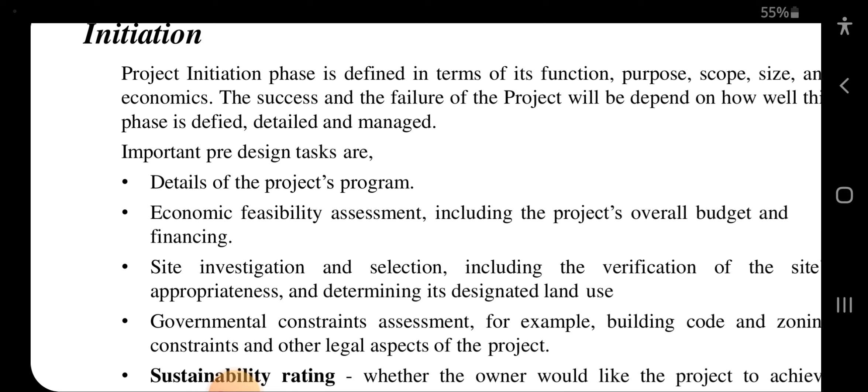Okay, we will go each step deeper a little bit more. Okay, in the initiation, as you can see, the project initiation phase is defined in terms of its function, purpose, scope, size and economics. The success and failure of the project will depend on how well the phase is defined, detailed and managed.

Important pre-design tasks are detail of the project's program, economic feasibility assessment, including the project's overall budget and financing, site investigation and selection, including the verification of the site's appropriateness and determining its designated land use. Government constraint assessment, for example, building codes and zoning constraints and other legal aspects of the project.

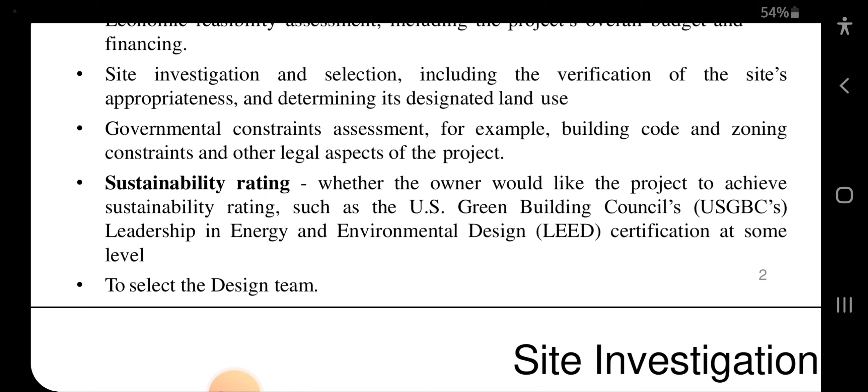Sustainability rating, whether the owner would like the project to achieve a sustainability rating such as US Green Building Council Leadership in Energy and Environmental Design certification at some level. To select the design team. Okay, these are the steps that we can identify at the initiation phase.

So in this phase, as you see, we need to take some approvals and we need to consider the design code such as British code or Euro code, and sustainability rating such as US Green Building Council or LEED. Okay, then we move on to the second phase of this project delivery life cycle, that is planning.

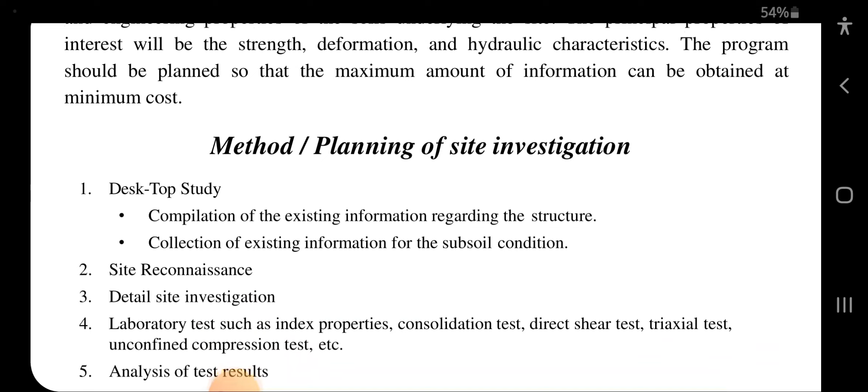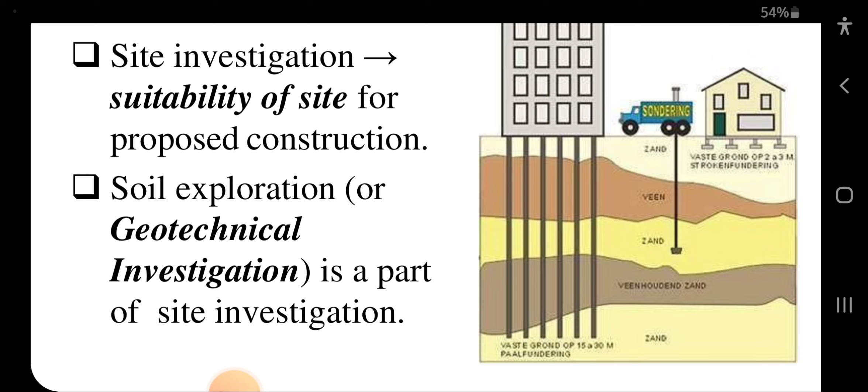In addition to that, we will see a definition. I have given some definition. The process of determining the layers of natural soil deposits that will underlie a proposed structure and their physical properties is generally referred to as site investigation.

Importance of site investigation. Let us see why it is important. To assess the suitability of the proposed site and the environment with the proposed project. Second one, to provide adequate information for design purpose with optimum cost, including temporary work. To plan for the best construction method.

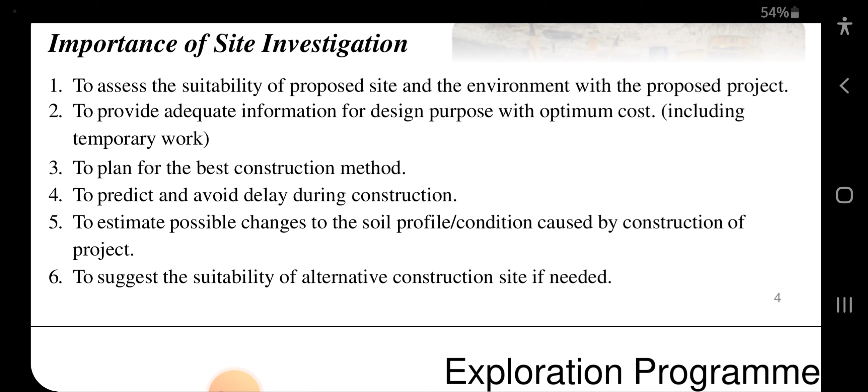Fourth one, to predict and avoid delay during construction. Fifth one, to estimate possible changes to the soil profile and condition caused by construction of the project. To suggest the suitability of an alternative construction site if needed.

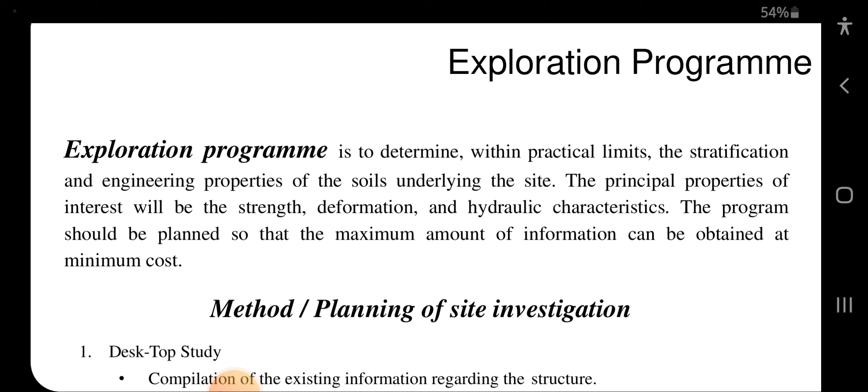Exploration program. The exploration program is to determine, within practical limits, the stratification and engineering properties of the soils underlying the site. The principal properties of interest will be the strength, deformation and hydraulic characteristics. The program should be planned so that the maximum amount of information can be obtained at minimal cost.

Okay, now we will see methods or planning of site investigation. Desktop study. So you have to know these technical terms when you are working in a construction site. Okay, we will see the desktop study. It is compilation of the existing information regarding the structure, collection of existing information for the subsoil condition.

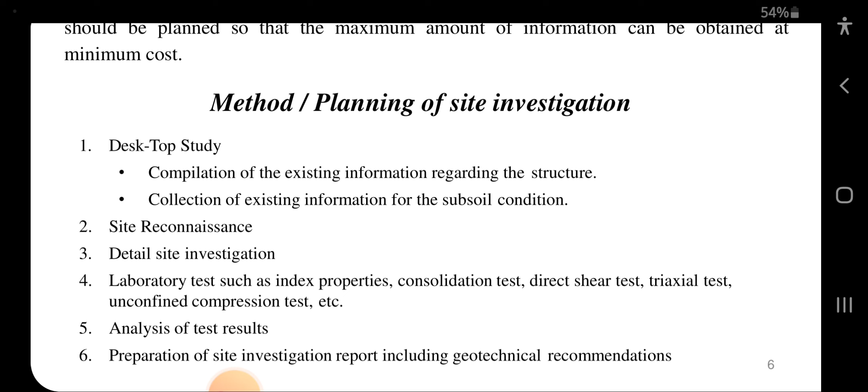Second one, site reconnaissance. Third one, detailed site investigation. Fourth one, laboratory tests such as index properties, consolidation test, direct shear test, triaxial test, unconfined compression test, etc. Fifth one, analysis of test results. Sixth one, preparation of site investigation report including geotechnical recommendations.

Okay, now you will see what is desktop study. Introduction. This refers to the studies carried out through research rather than physical investigation. This is the preliminary investigation carried out for the proposed project. This will be less time consuming and less expensive than the physical investigation. Initial understanding of the site situation, potential risks and details, scope and methodology of subsequent investigation.

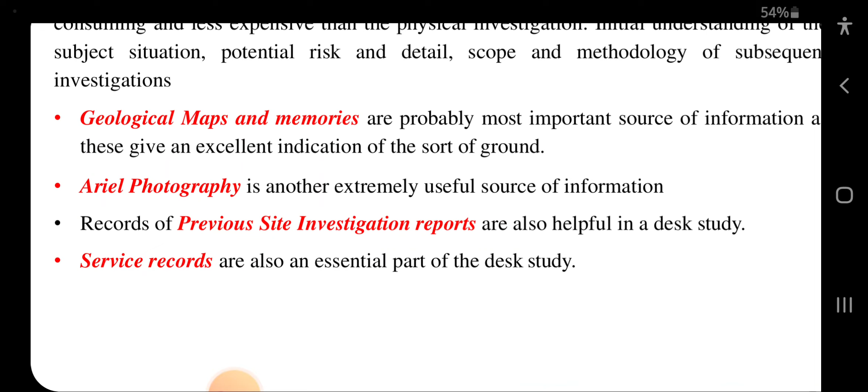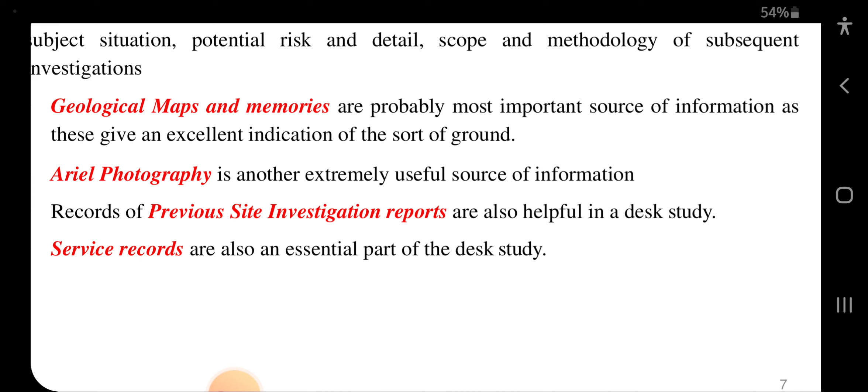Geological maps and memoirs are probably the most important sources of information, as these give an excellent indication of the sort of ground. For example, you can see Google Maps of the site. Aerial photography is another extremely useful source of information. Records of previous site investigation reports are also helpful in a desk study. Service records are also an essential part of the desk study.

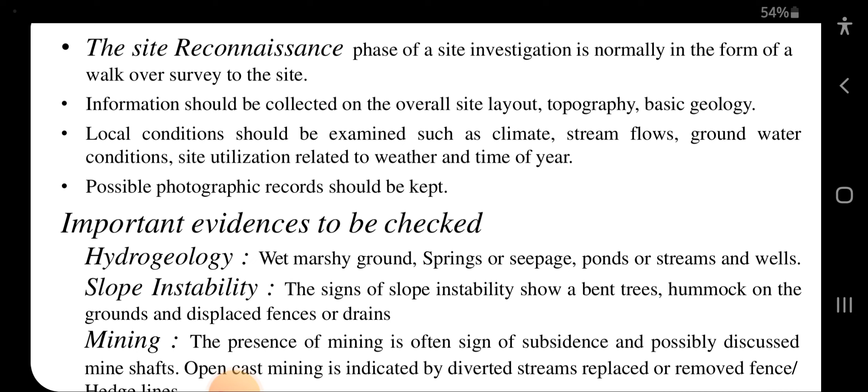Site reconnaissance. The site reconnaissance phase of a site investigation is normally in the form of a walk-over survey of the site. Information should be collected on the overall site layout, topography, basic geology. Local conditions should be examined, such as climate, stream flows, groundwater condition, site utilization related to weather and time of year. Possible photographic records should be kept. Important evidence to be checked.

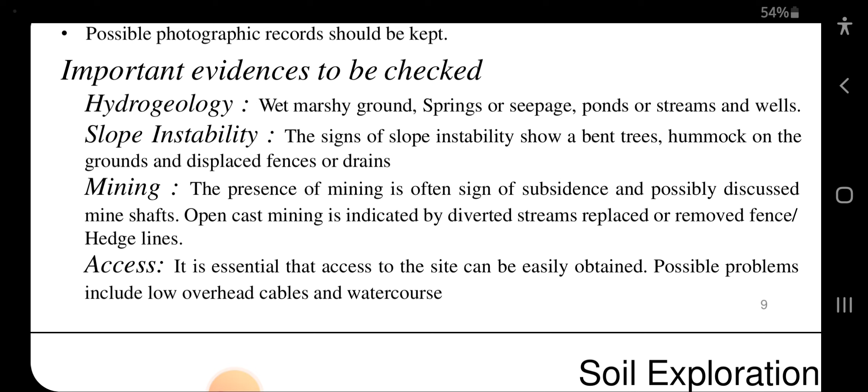Springs or seepage, ponds or streams and wells. Slope instability. The signs of slope instability are bent trees, hummocks on the ground and displaced fences or drains. Mining. The presence of mining is often a sign of subsidence and possibly disused mine shafts. Open cast mining is indicated by diverted streams, replaced or removed fences, hedge lines. Access. It is essential that access to the site can be easily obtained. Possible problems include low overhead cables and water courses.

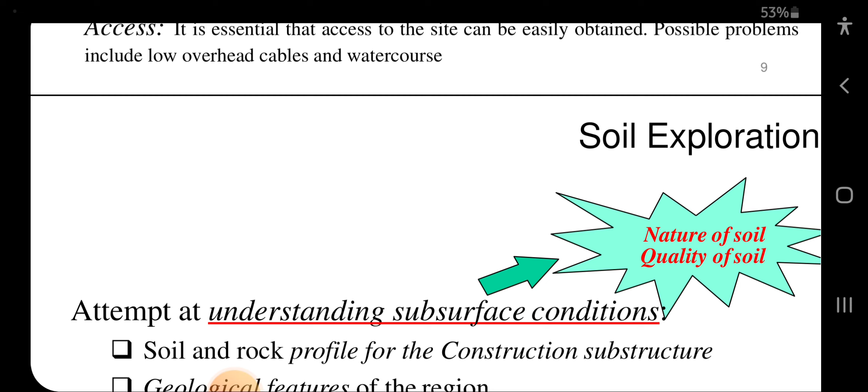Soil exploration. Nature of soil, quality of soil we will explore. Attempt at understanding subsurface conditions. Soil and rock profile for the construction of the substructure. Geological features of the region. Position and variation of groundwater table. Physical properties of soil and rock. Contamination, if any. General data of adjacent structures, hydrological data, topography, soil maps,

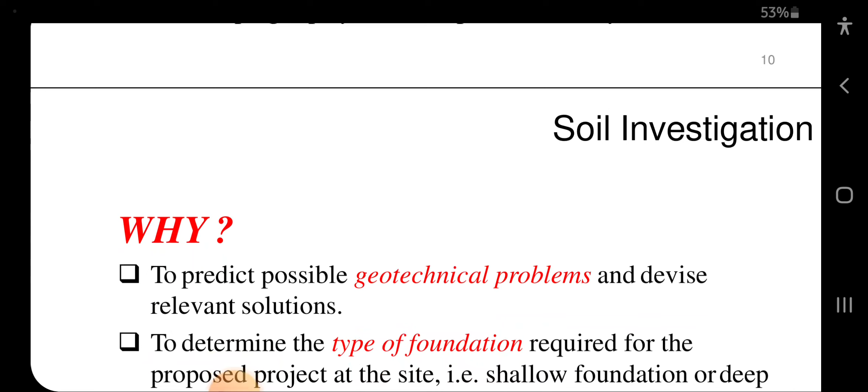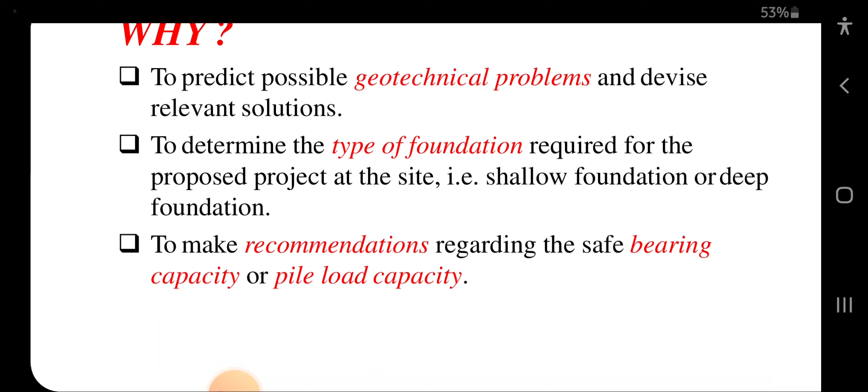seismicity, etc. Soil investigation. Why do we do soil investigation? To predict possible geotechnical problems and devise relevant solutions. To determine the types of foundation required for the proposed project at the site, that is shallow foundation or deep foundation. To make recommendations regarding the safe bearing capacity or pile load capacity.

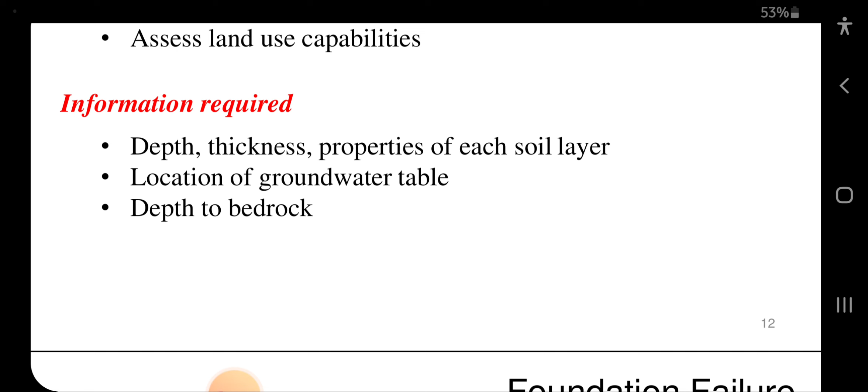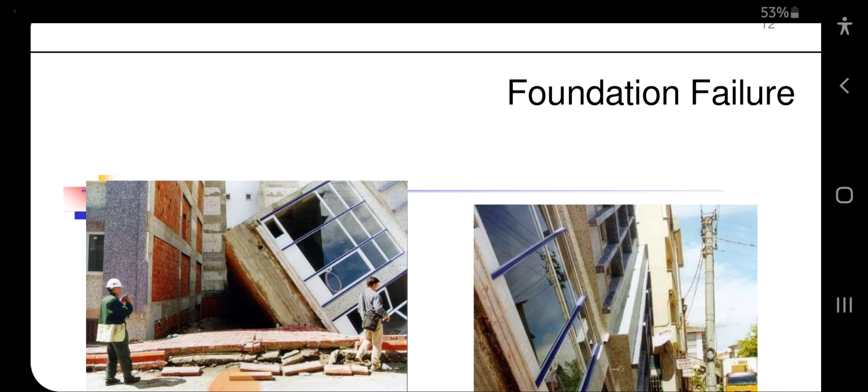Okay, now we will see some images of some defects in foundations. So foundation failures, as you can see in both images, the structures are collapsed. See, on your left hand side and right hand side, all the structures are collapsed. Sinkholes, you see some places where the ground has sunk.

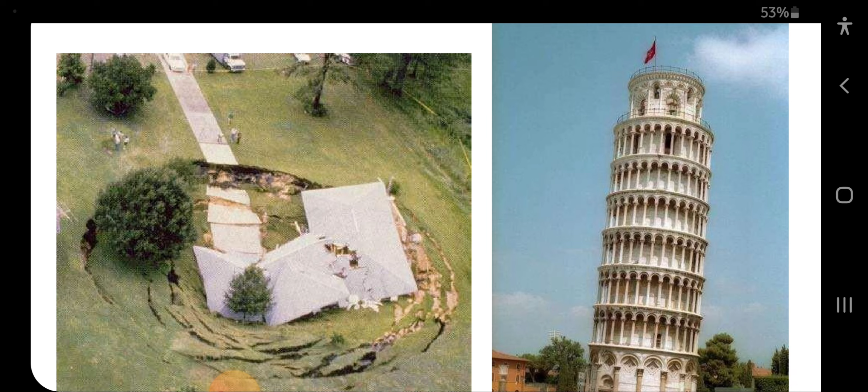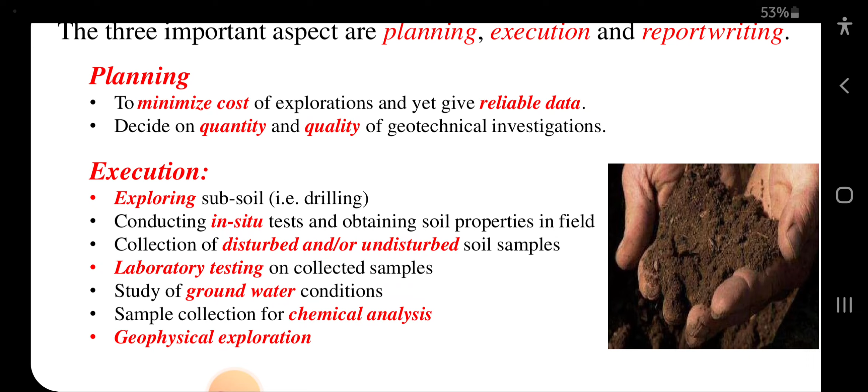Right. Soil exploration. We will see how soil exploration will be done. The three important aspects are planning, execution and report writing. Planning, to minimize cost of exploration and yet give reliable data. Decide on quantity and quality of geotechnical investigation. Execution, exploring subsoil, that is drilling. Conducting in situ tests and obtaining soil properties in the field.

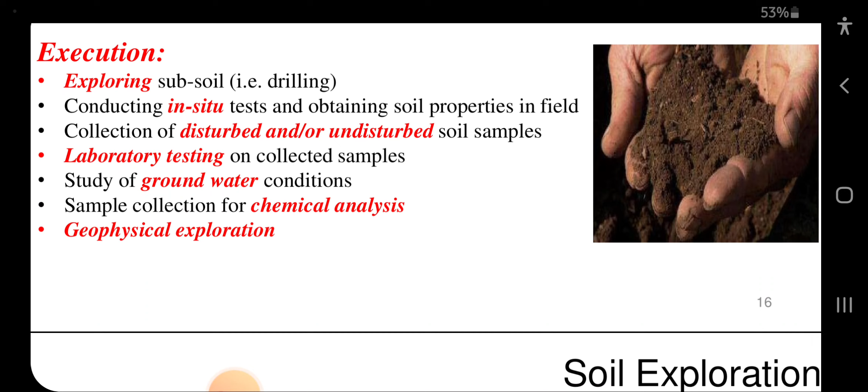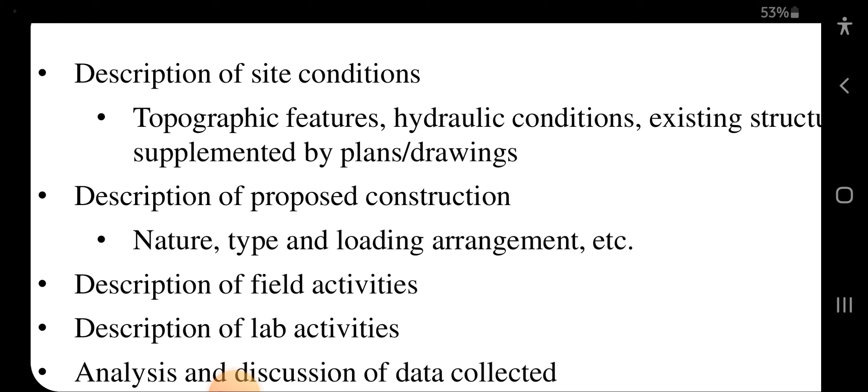Collection of disturbed and/or undisturbed soil samples. Laboratory testing on collected samples. Study of groundwater conditions. Sample collection for chemical analysis, followed by geophysical exploration. Report writing, description of site condition, topographic features, hydraulic condition, existing structures, supplemented by plans and drawings. You have to provide it additionally.

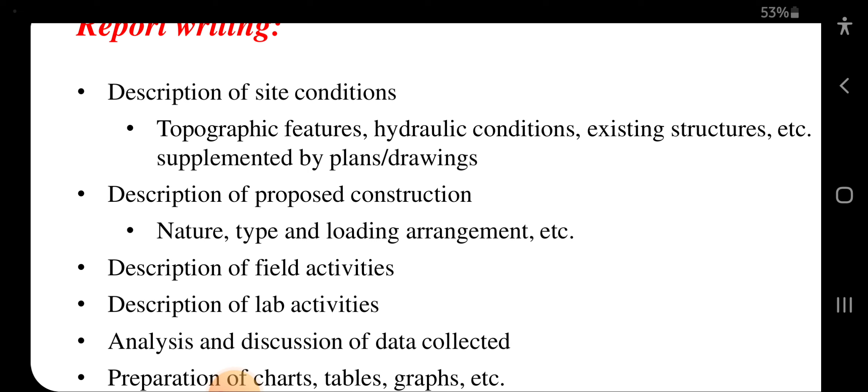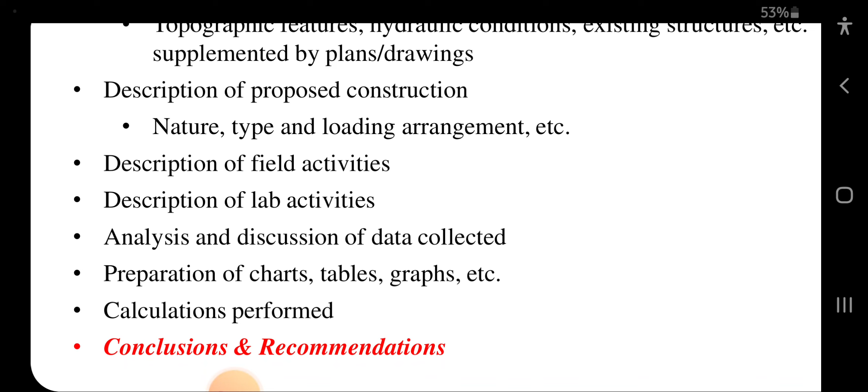A description of proposed construction, nature, type and loading arrangement, description of field activities, description of lab activities, analysis and discussion of data collected, preparation of charts, tables, graphs, etc., calculations performed, conclusion and recommendations. Okay, now we will see the geotechnical design cycle.

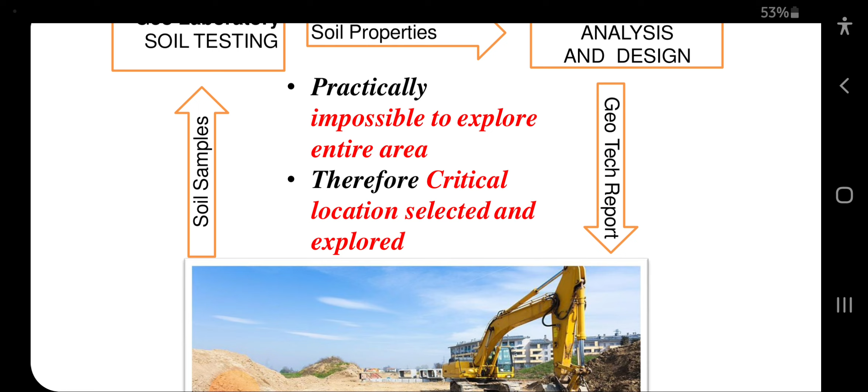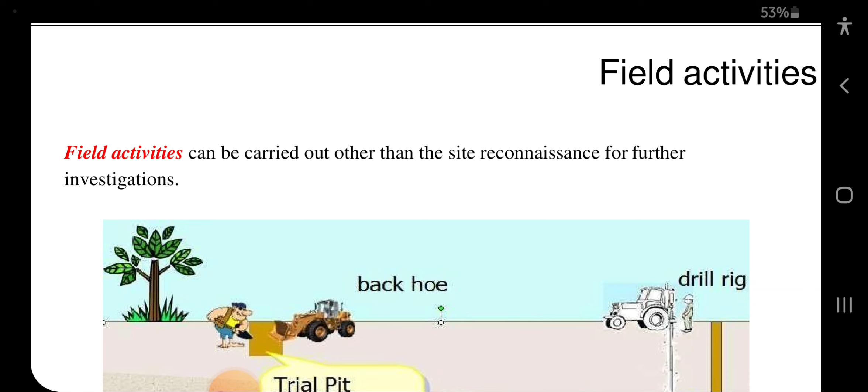Field activities. Field activities can be carried out other than the site reconnaissance for further investigation. So field activities, you can see backhoe, drill rig, trial pit. We can see some trial pits are constructed, and the depth of the trial pit could be 1 to 2 meters or 2 to 4 meters. Borehole, we also do some borehole investigation.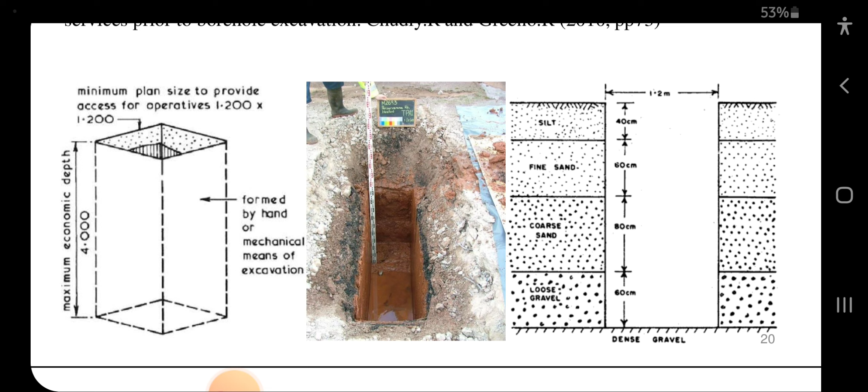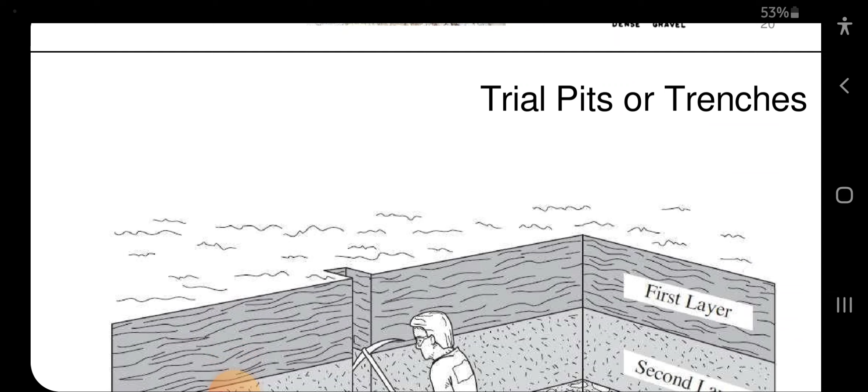So this site investigation, borehole excavation, this is how the trench, trial pits or trenches. Trial pits or trenches, you see in this image also, first layer, second layer, third layer, likewise the soil is stacked layer-wise.

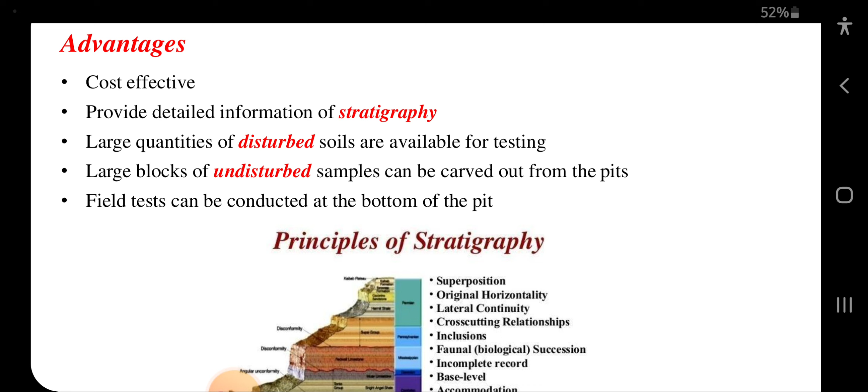Trial pits or trenches. Advantages: cost effective, provide detailed information of stratigraphy. Large quantities of disturbed soils are available for testing. Large blocks of undisturbed samples can be carved out from the pits. Field tests can be conducted at the bottom of the pit.

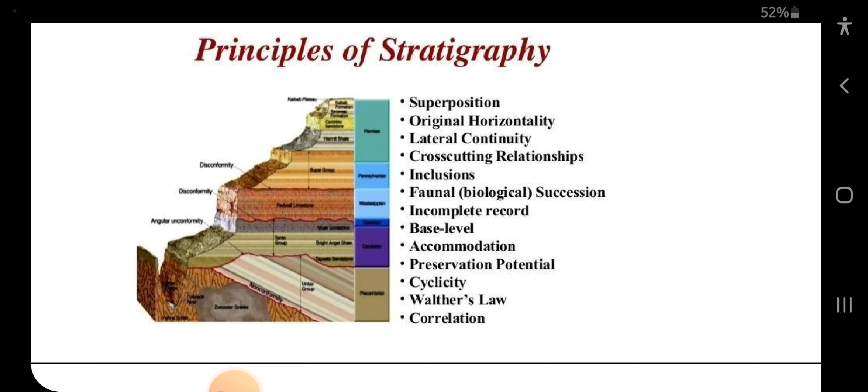Principles of stratigraphy. Correlation, Walther's Law, cyclicity, preservation potential, accommodation, base level, incomplete record, faunal (biological) succession, inclusion, cross-cutting relationships, lateral continuity, original horizontality, superposition.

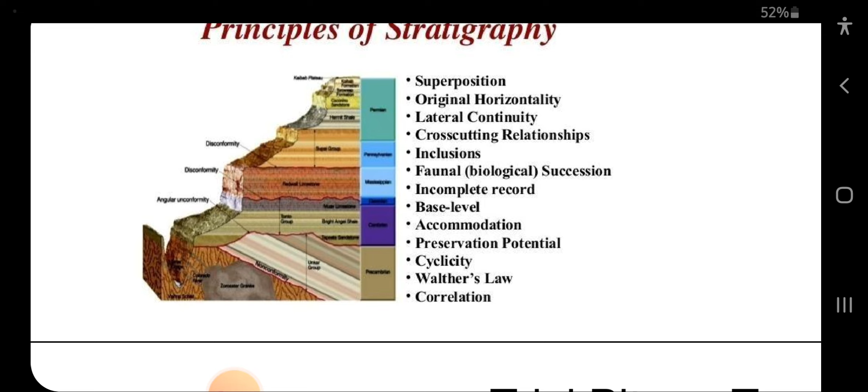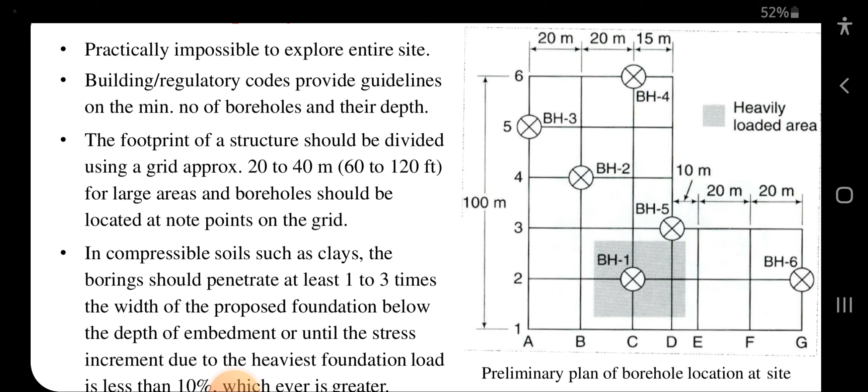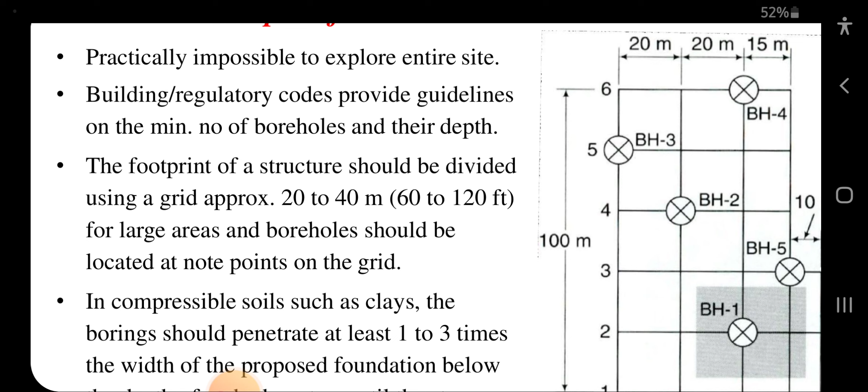So likewise, all the boreholes are arranged in a grid so that each and every borehole location can be identified accurately. It is practically impossible to explore the entire site. Building regulatory codes provide guidelines on the minimum number of boreholes and their depth.

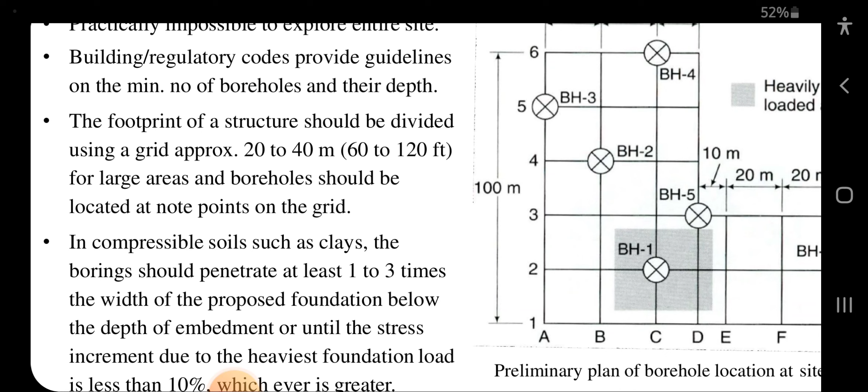So the footprint of a structure should be divided using a grid of approximately 20 to 40 meters for a large area, and boreholes should be located at node points on the grid. In compressible soil such as clay, the boring should penetrate at least 1 to 3 times the width of the proposed foundation below the depth of embedment, or until the stress increment due to the heaviest foundation load is less than 10%, whichever is greater.

Preliminary plan of borehole location at site. The figure will show. Location and depth of borehole continued. In very stiff clay and dense coarse grained soils, boring should penetrate 5 to 6 meters to ensure that the thickness of the stratum is adequate.

Boring should penetrate at least 3 meters, or 10 feet, into rock. Boring must penetrate below any fills or very soft deposits below the proposed structure. The minimum depth of borehole should be 6 meters unless bedrock or very dense material is encountered.

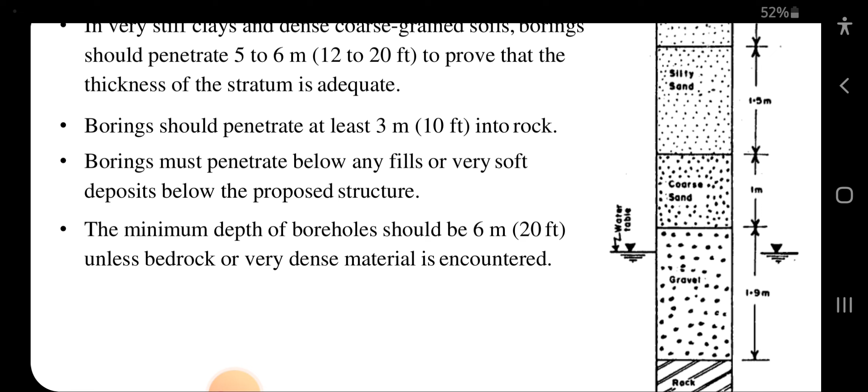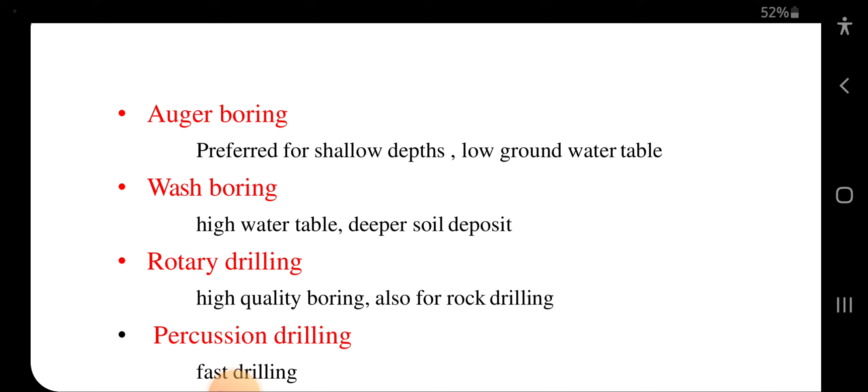Method of boring: auger boring, preferred for shallow depths, low groundwater table. Wash boring, high water table, deeper soil deposit. Rotary drilling, high quality boring, also for rock drilling. Percussion drilling, fast drilling.

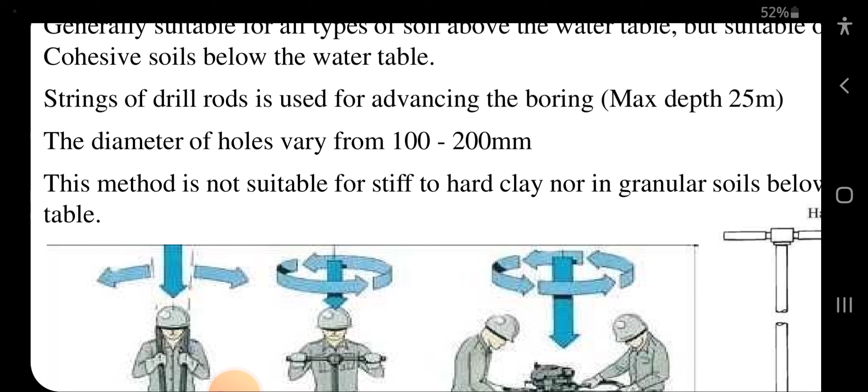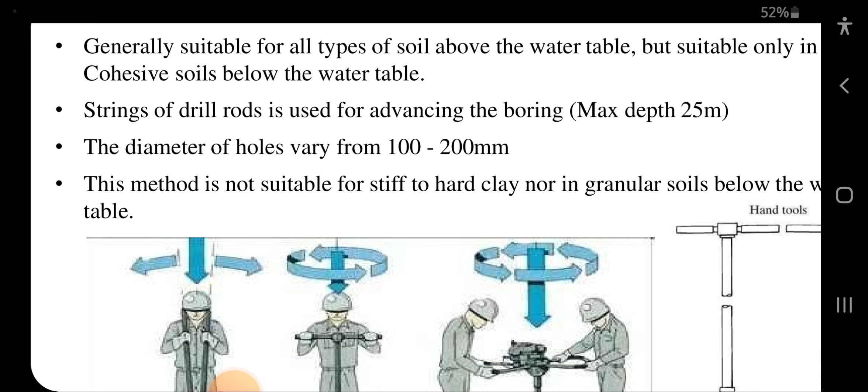Hand auger, generally suitable for all types of soil above the water table, but suitable only in cohesive soil below the water table. Strings of drill rods are used to advance the boring. Maximum depth 25 meters. The diameter of holes varies from 100 to 200 millimeters. This method is not suitable for stiff to hard clay nor in granular soils below the water table.

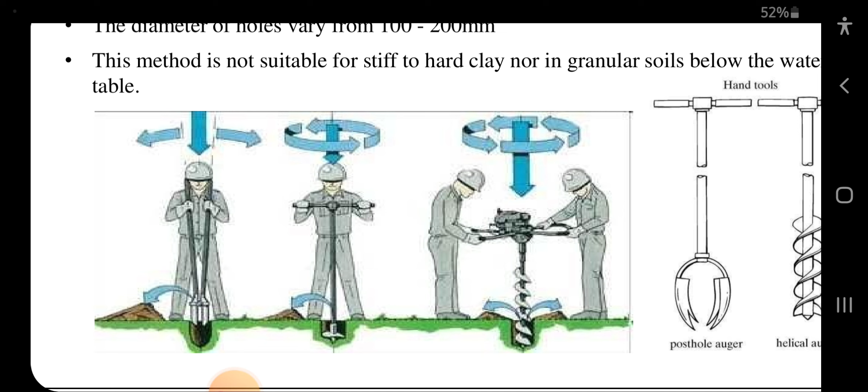So you can see how this hand auger is working. It's like a drill. So the hand tools are two types. In your right hand side image, you can see these hand tools, that is the post hole auger and the helical auger, two types, right?

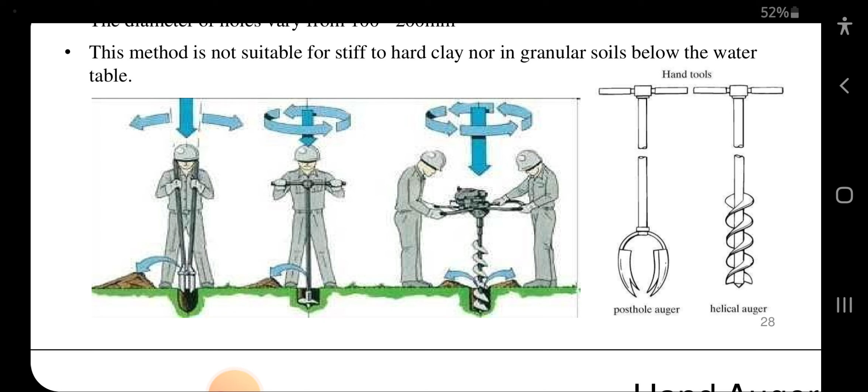In the left hand side image you can identify the post hole auger being used by the man who appeared first in this image, and the two men working with the helical auger are in the last image. Hand auger you can see in the practical scenario.

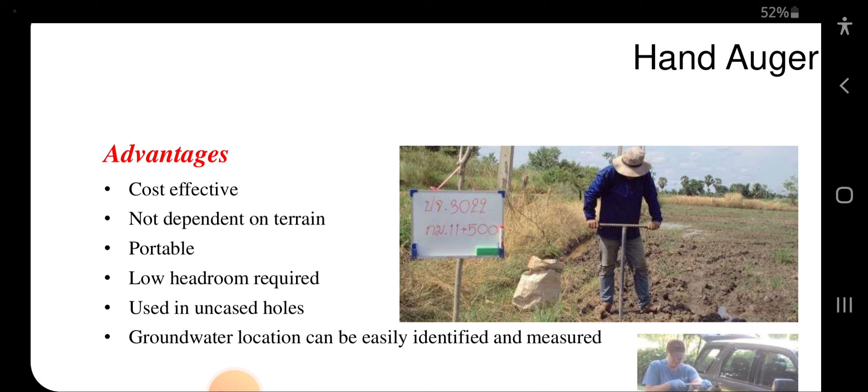Advantages: cost effective, not dependent on terrain, portable, low headroom required, used in uncased holes, groundwater location can be easily identified and measured.

Then disadvantages: depth limited to about 3 meter to 25 meter, labor intensive, undisturbed samples can be taken for soft clay deposits only, cannot be used in rock, stiff clay, dry sand, etc.

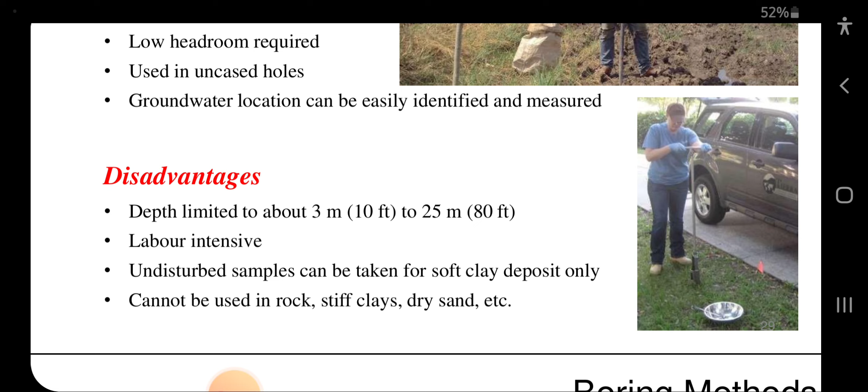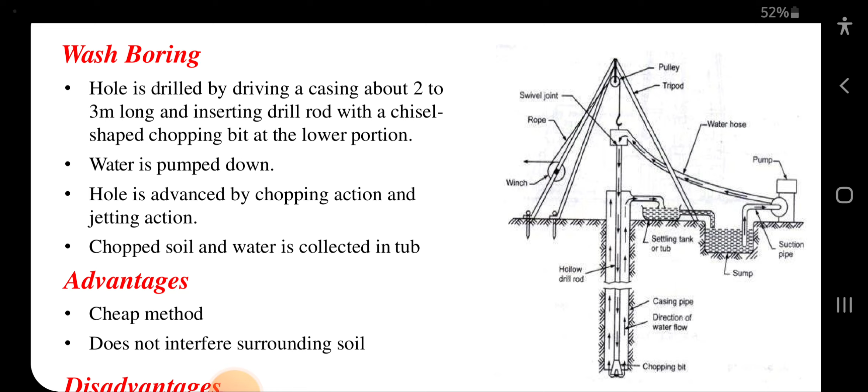Wash boring is another method where the hole is drilled by driving a casing about 2 to 3 meter long and inserting a drill rod with a chisel shaped chopping bit at the lower portion. You can see this chopping bit in the right hand side image, along with the direction of water flow and the casing pipe.

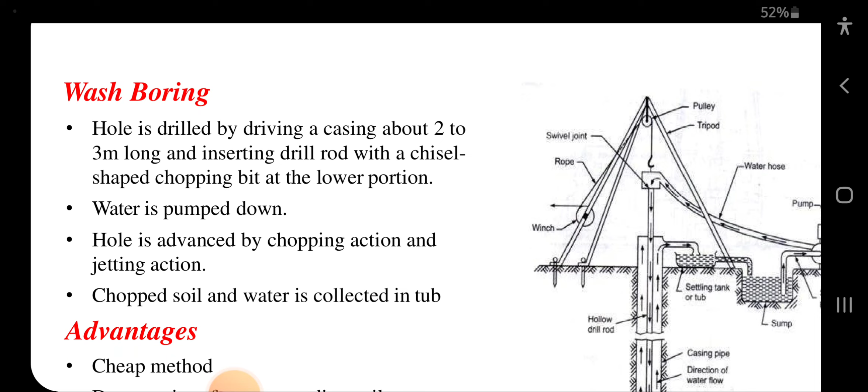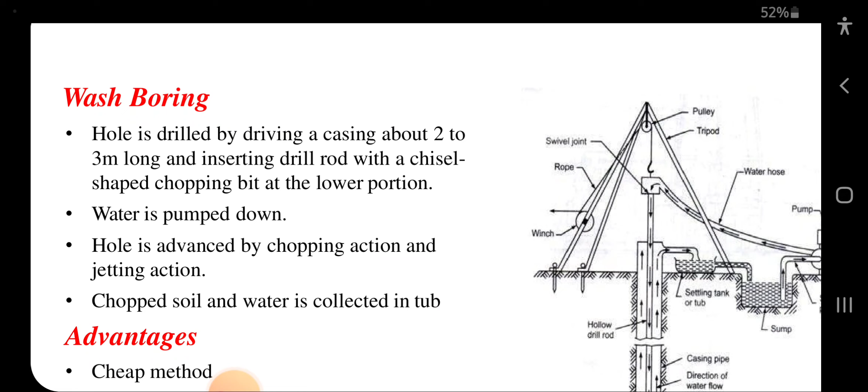This water is pumped down. The hole is advanced by chopping action and jetting action. Chopped soil and water is collected in a tub. You can see these things in this picture.

Advantages: cheap method, does not interfere with surrounding soil. Disadvantages: finer particles such as clay and loam do not settle easily, large heavy particles may not be brought up at all, and the exact location of the material cannot be determined easily.

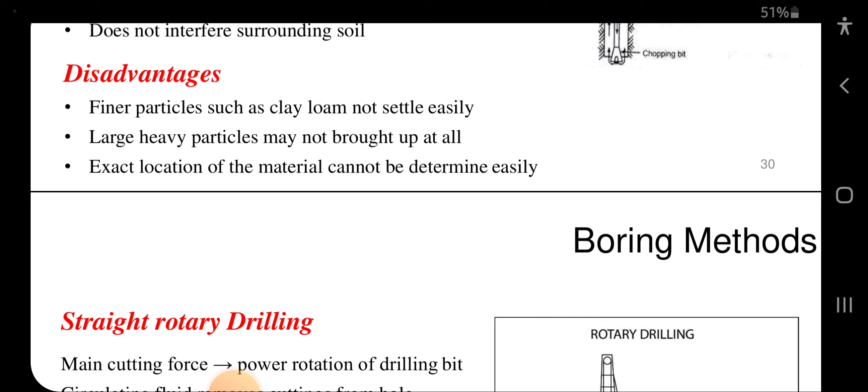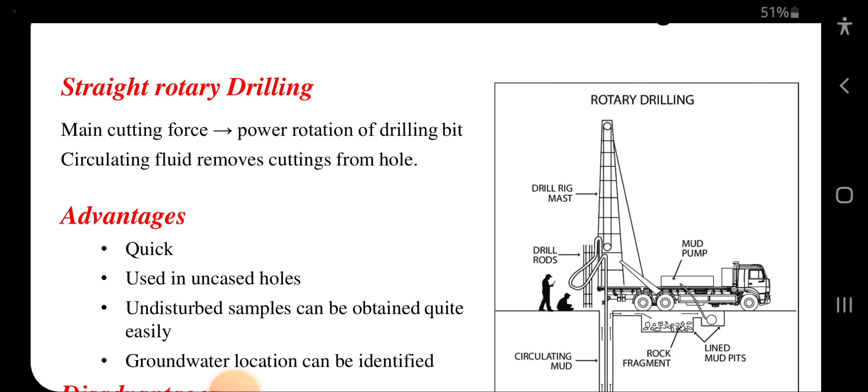Straight rotary drilling: main cutting force is power rotation of the drilling bit, with circulating fluid used to remove cuttings from the hole.

Advantages: quick, used in uncased holes, undisturbed samples can be obtained quite easily, and groundwater location can be identified.

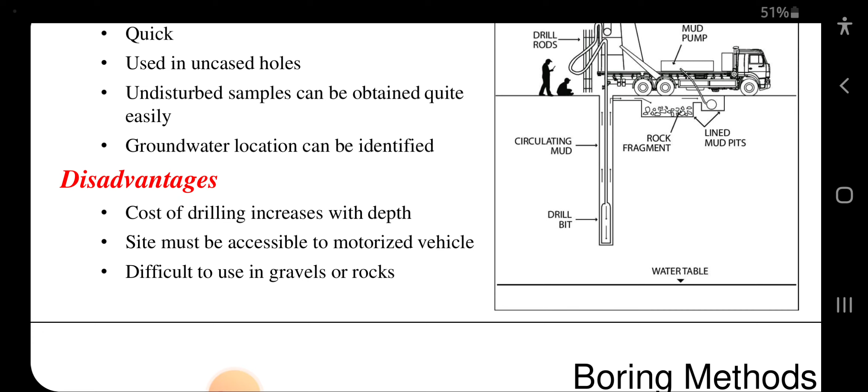This method also has some disadvantages: cost of drilling increases with depth, the site must be accessible to motorized vehicles, and it's difficult to use in gravel or rocks.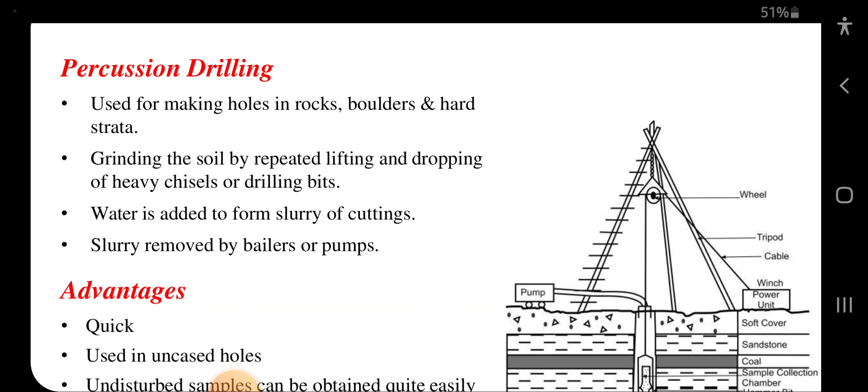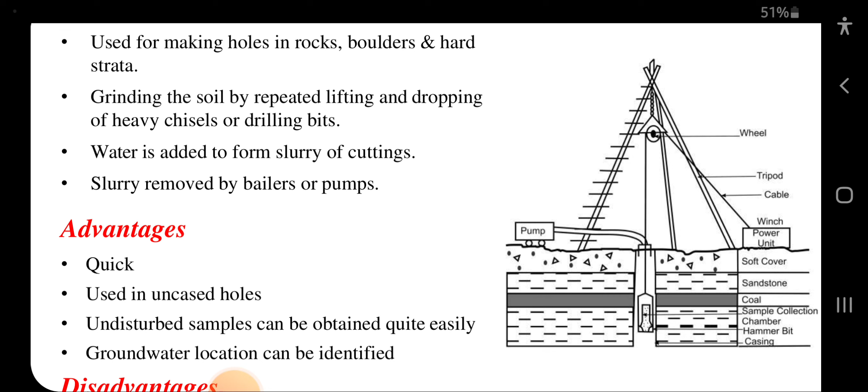Water is added to form a slurry of cuttings, which is then removed by bailers or pumps. Advantages: quick, used in uncased holes, undisturbed samples can be obtained quite easily, and groundwater location can be identified. Disadvantages: site must be accessible to motorized vehicle.

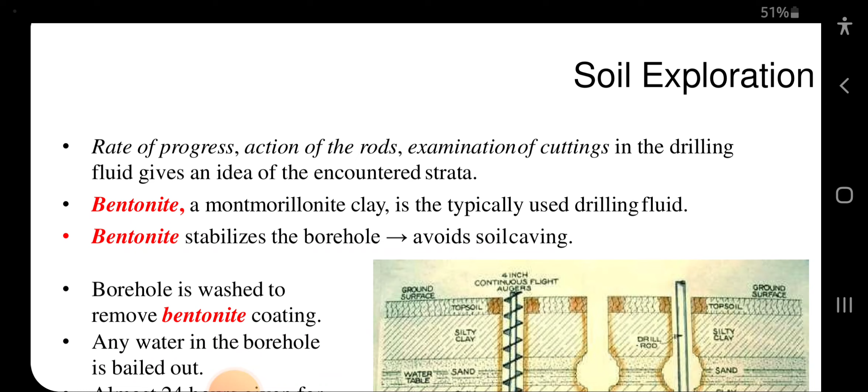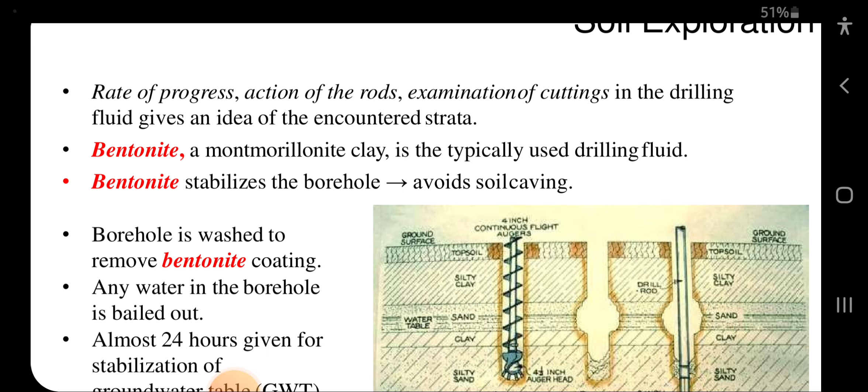Rate of progress depends on the action of the rod. Examination of cuttings in the drilling fluid gives an idea of the encountered strata. Bentonite, or montmorillonite clay, is the typically used drilling fluid. Bentonite stabilizes the boreholes and avoids soil caving.

The borehole is washed to remove the bentonite coating. Any water in the borehole is bailed out. Almost 24 hours are given for stabilization of the groundwater table, after which the depth of the groundwater table is determined.

In this image, you can see a continuous flight auger drilling through caving materials.

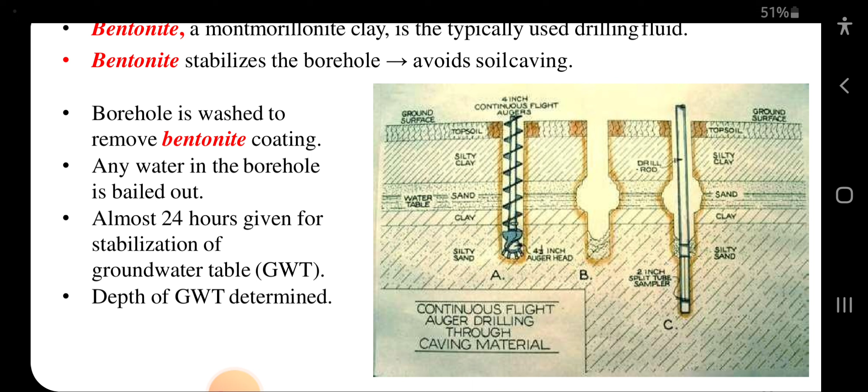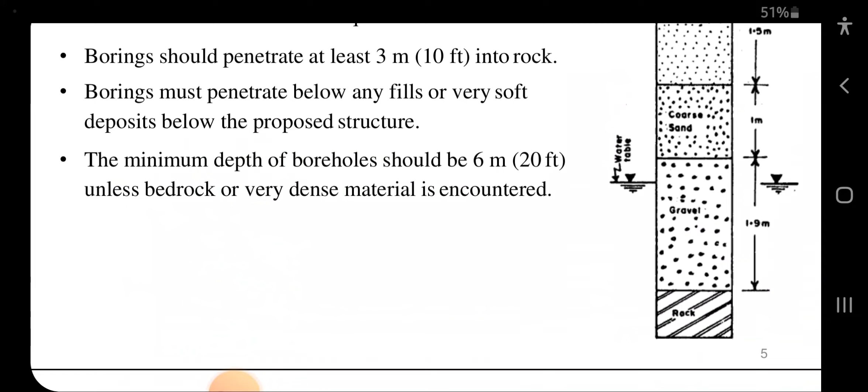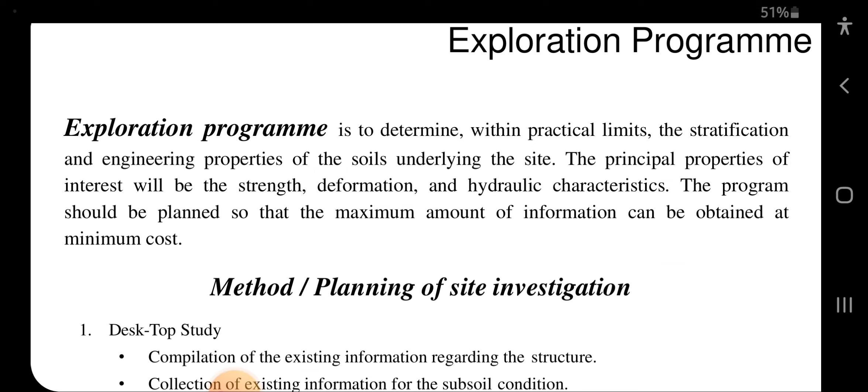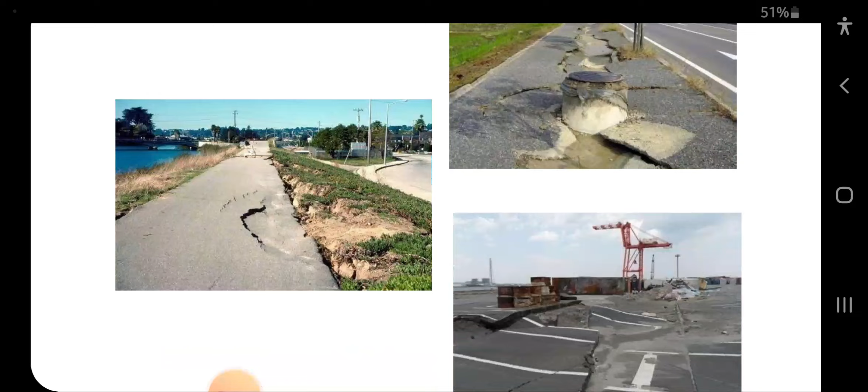So today these are the things I wanted to discuss. We basically covered in this section what the project delivery phases are, the importance of site investigation, some drilling methods, some soil investigation techniques, and we have seen some images of failure structures of foundations, pavement failures, sinkholes, and soil exploration.

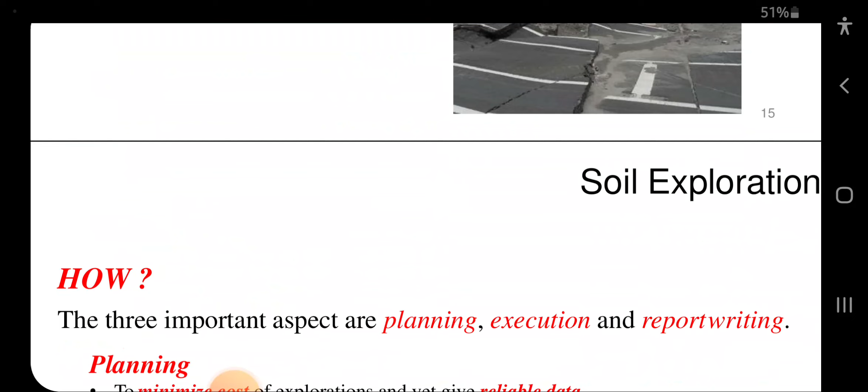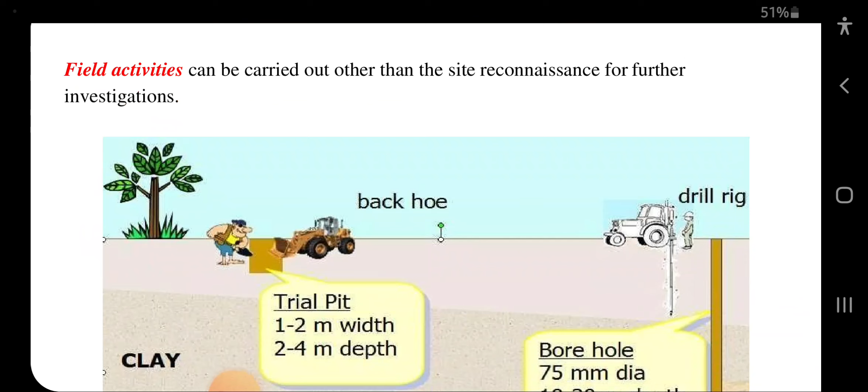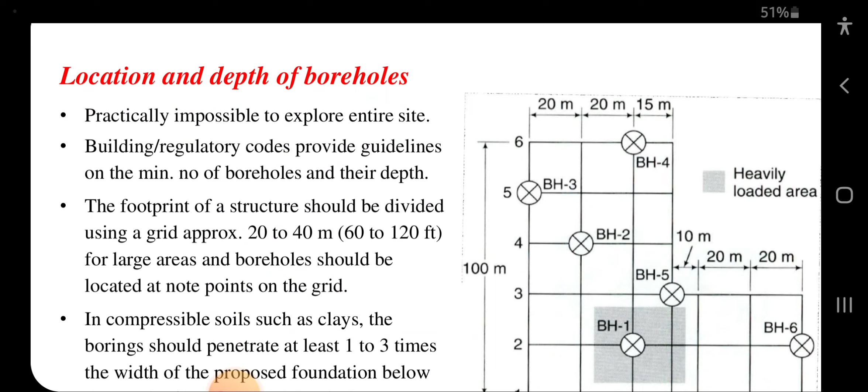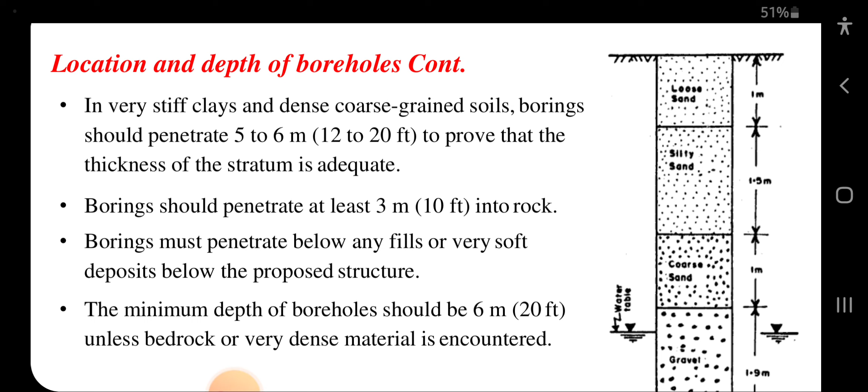We have seen the geotechnical design cycle, and field activities such as backhoe and drill rig—trial pits and boreholes—sometimes called trenches. We saw their advantages and disadvantages, along with borehole location and depth, which could be 5 to 6 meters. We also covered methods of boring: auger boring, wash boring, rotary drilling, and percussion drilling.

Having gone through these things, we have concluded this section. I hope you would get some idea of what the project delivery phases are, the importance of site investigation, and the methods of site investigation.